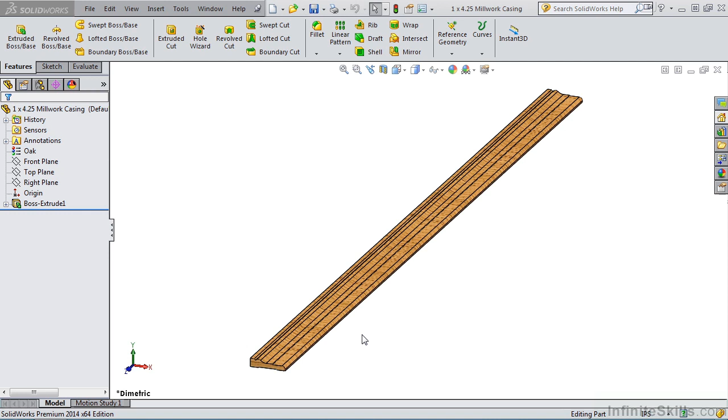If we were to place this model on a drawing sheet, it would have to be drawn at a very small scale in order to fit on a standard size sheet. In SOLIDWORKS, we have a command in the drawing environment that allows you to remove a center portion of this and then move the two ends together, which results in allowing you to have a larger scale, which makes it easier to see the part. Let's give it a try.

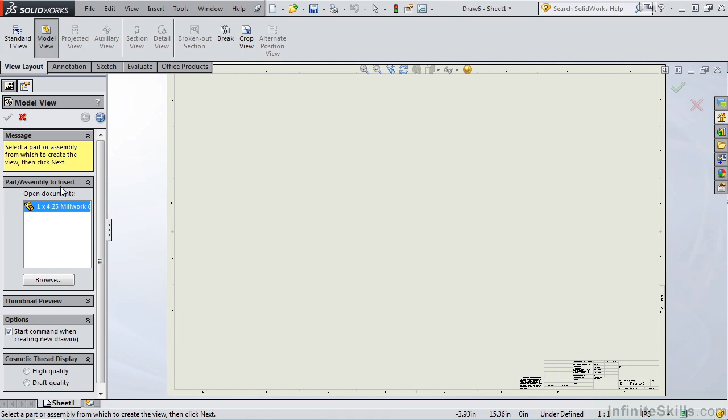I am going to select New, Drawing. OK. Let's go ahead and use a D ANSI landscape. I'll select OK. And then I want to change my units to inches. I'm going to go to my View Layout ribbon, select Model View. There's my casing. I'll select Next, and then a front view. Now this is not the front view I was expecting. So obviously I need to go back here and try a different view.

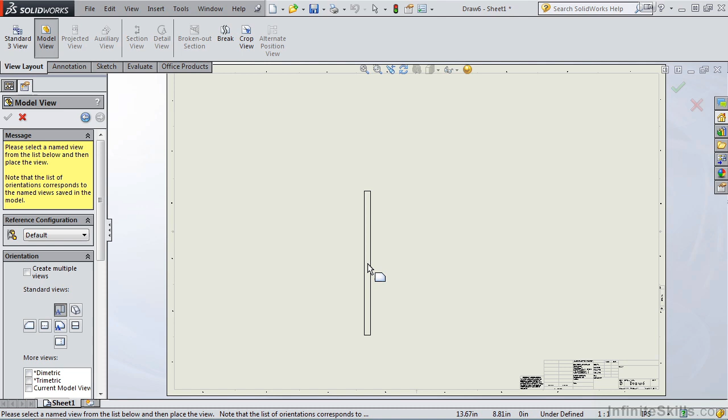Right-hand side view looks better, still not the view I was expecting. Let's try the top view. Much better. That's about the width of the casing. I'll go ahead and place it, and then place a bottom view. I'll close out of projected view, and then fit the sheet to the screen.

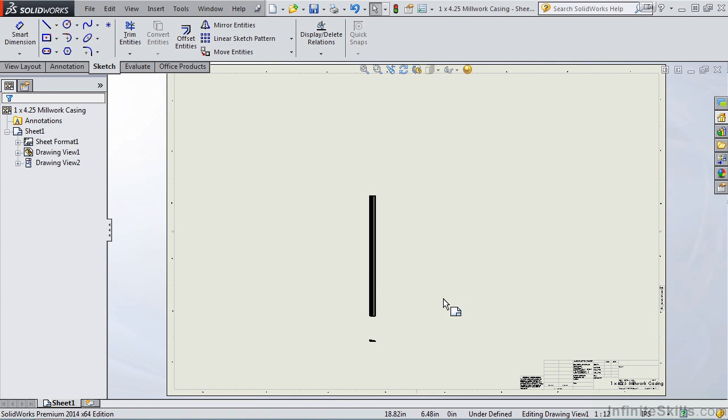Now notice, in order to place that casing on the sheet, we had to use a very small scale. The result is nothing more than a black blob on the screen. So how do we correct that? Well, if you look down here, you see the scale is 1 to 12. Let's change that scale. I am going to right mouse click on the sheet, select Properties. I'm going to change that scale 1 to 2, and I'll select OK.

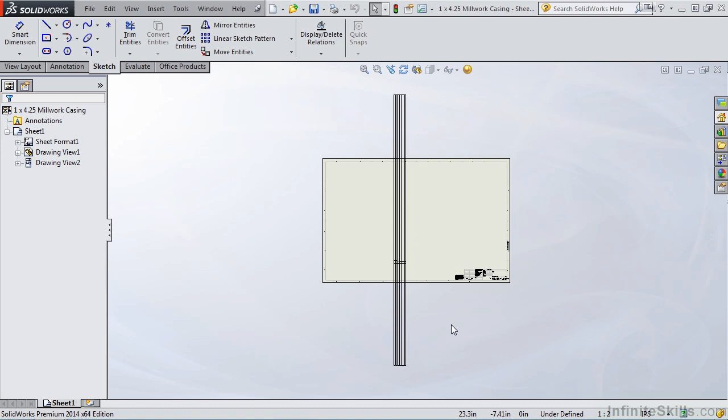Notice when I do that, and then tap the F key to fit to the screen, my casing is spanning off the sheet. Not a problem. Let's go into the View Layout ribbon and select the Break command. The Break command wants you to go out to the graphics area and select a view. So I'm going to select this view here.

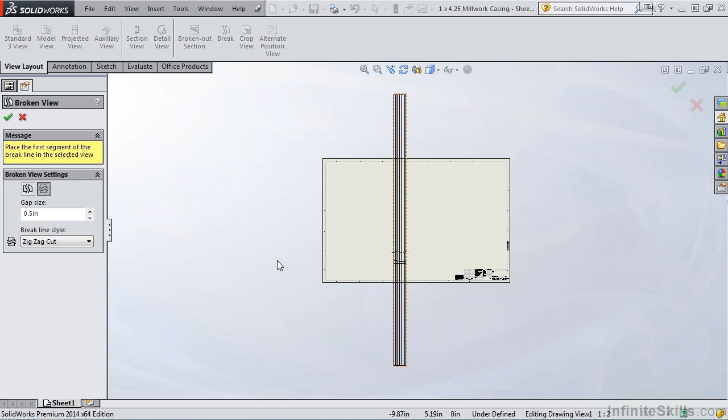As soon as I select a view, the Property Manager expands, and I have two options here. Do I want to break it vertically or horizontally? I want to break this horizontally. So as soon as I select this, I can go out to the screen, and notice as I zoom up, there's my break line. I placed my first one. I'm going to go to the opposite end and place a second one.

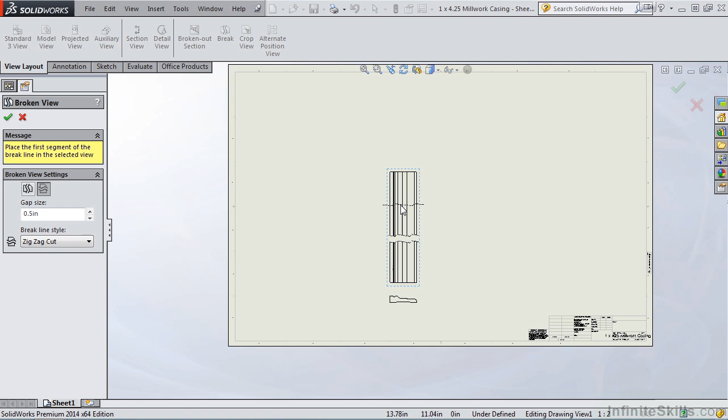If I tap F on the keyboard, notice what it did. It removed that center portion of the casing and moved the two ends together. That allows me to fit this on the drawing sheet. Notice I can apply more breaks. I'm not going to do that. If I zoom up on the break, notice we do have some options over here.

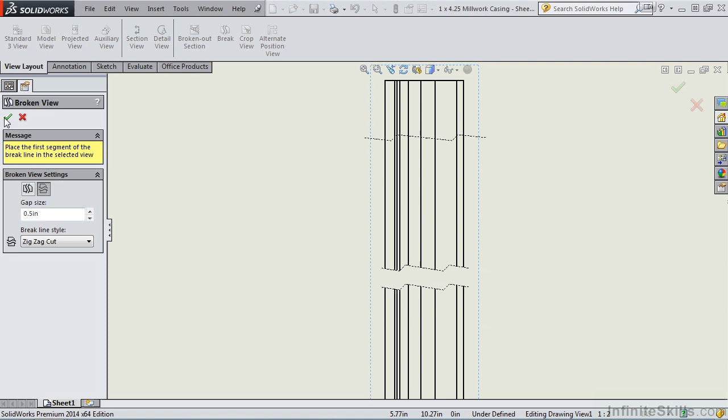The gap size, it's currently at 1/2 inch, 0.5, and I have different styles of break lines. Straight cut, notice the preview on the screen. Curve cut, zigzag, and small zigzag. I'm going to go back to the default of zigzag. I'll close out of the broken view. Notice I can reposition. I want to try to center them just a little bit better.

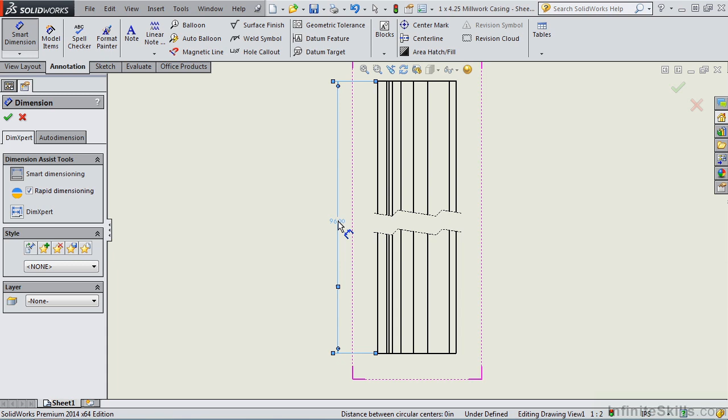And there we go. Now I am going to apply one smart dimension. I'll select the two ends. And notice I still have the real length of that casing, 96 inches. But notice in the dimension line, I have a zigzag. And if you know your drafting standards, you know that anytime you see a zigzag in a dimension line, that tells you this is the real length of the product.

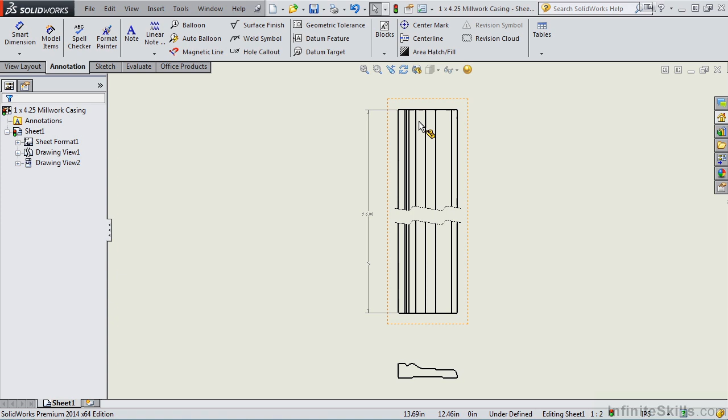However, what you're seeing on the screen is not that length. This is far less than 96 inches. I'll fit this to the screen. And it looks like we probably could have gone with a scale of 1 to 1. So I can always right mouse click, select Properties, and change this to 1.

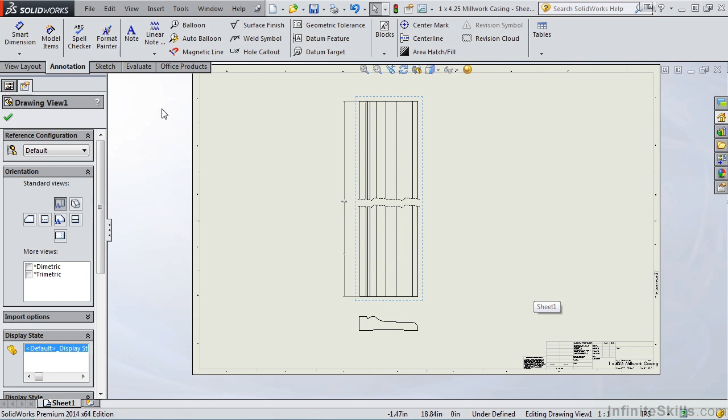I'll need to move my views apart a little bit. Once again, fit it to the screen, close out of the Property Manager, and we have the casing at a much larger scale, much easier to see in the sheet. Now we can actually detail this profile where it's going to be legible.